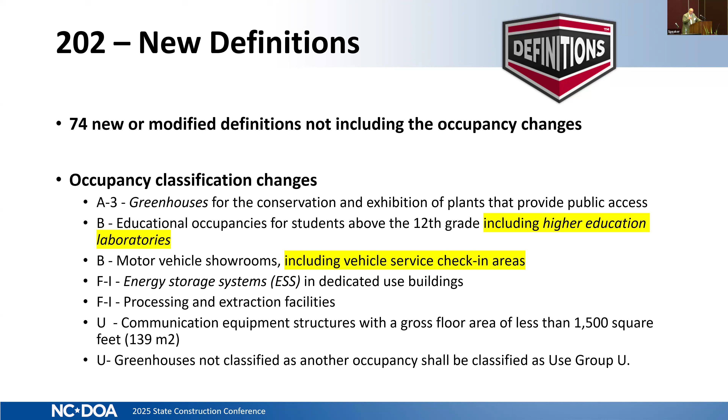There's a modification on the Group B motor vehicle showrooms that includes the check-in areas. If you have an area where a vehicle is going to be brought in to do triage and they're going to move the vehicle to do repair somewhere else, that area is still going to be classified as part of the Group B. Energy storage in a dedicated use building will be an F1 occupancy. Your process and extraction facilities will be F1. Then you have 2 Group U classifications for small incidental communication buildings and those greenhouses.

There's also 6 additional criteria added to 203 of the fire code, as well as 307 of the building code, that keeps a building from being classified as a Group H.

Aerosol storage is one of them if they meet the requirements of Chapter 51. Stationary fuel cell and capacitor energy storage if they meet the Chapter 12 requirements. The Group B higher education labs. And then the last two are your distilling and brewing and storage of beverages, your distilled spirits and wine storage.

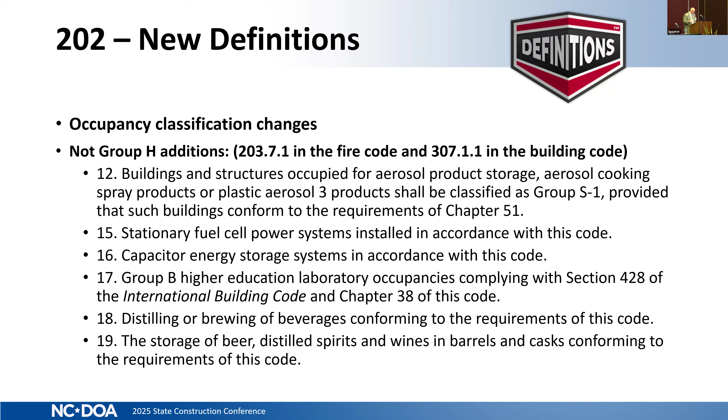So those will all remain how they're classified without being classified as Group H. We'll talk a little bit more about some of those as we get into the presentation.

Some of the key changes related to fire protection, and this is a big one, is that current code Appendix B and Appendix D are only enforceable if adopted through local ordinance. The new code deletes those two appendices and embeds those requirements into Section 503 for access and 507 for water supply.

The main reason for that was to provide consistent application across the state. With local adoption, you had some jurisdictions enforcing those requirements and others were not, and it was creating a consistency issue. So the committee's recommendation was to incorporate those requirements into Chapter 5.

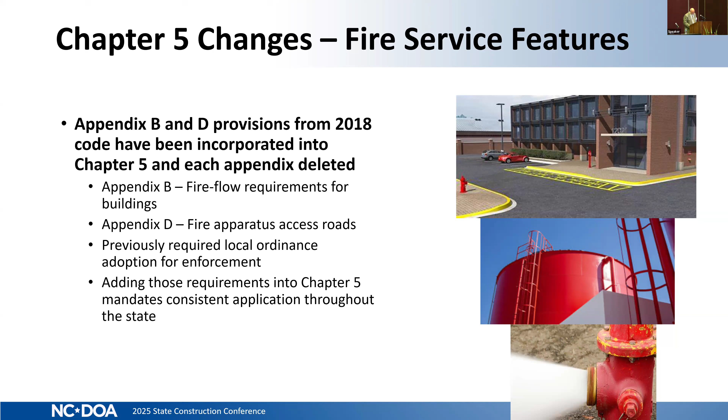So let's start by looking at some of the new access requirements that will be a result of that. The first one is we have two means of access now required for certain structures.

If I have a building that exceeds 3 stories or 30 feet in height, there'll be a requirement for 2 fire department access roads to access that building. If the building exceeds 62,000 square feet, there's also an exception that will allow that 62 to double to 124 if that building is protected by sprinklers. So a fully sprinklered building up to 124,000 square feet, you can still get by with 1 access route. If it's not sprinklered, anything over 62,000 is required to be accessed by 2 different routes.

The multifamily residential requirement - and I apologize for the inconsistency in the way it's worded - the first bullet says single access is allowed for up to 200 units if they're sprinklered with a 13 or 13R system, which commercial apartments newly built in North Carolina will be. But really the requirement is multifamily with more than 100 dwelling units, so you'd have to exceed 200 dwelling units before that access requirement is there for 2.

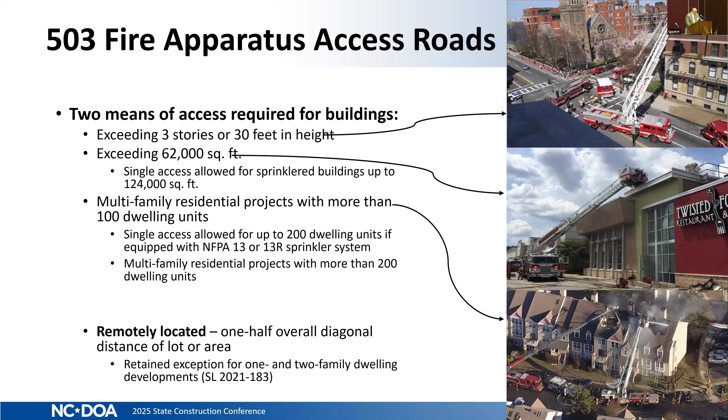There's also going to be new requirements for aerial apparatus access roads where the vertical distance between grade plane and the highest roof surface is over 30 feet. So if there's a requirement for aerial apparatus access, then that road width is going to increase from 20 feet wide to 26 feet wide. That aerial apparatus has to be at least 15 feet away from the face of one side of the building and no more than 30 feet.

And there cannot be any overhead obstructions. So any utility, power lines, none of that can be within the designated area that's identified as the aerial apparatus access.

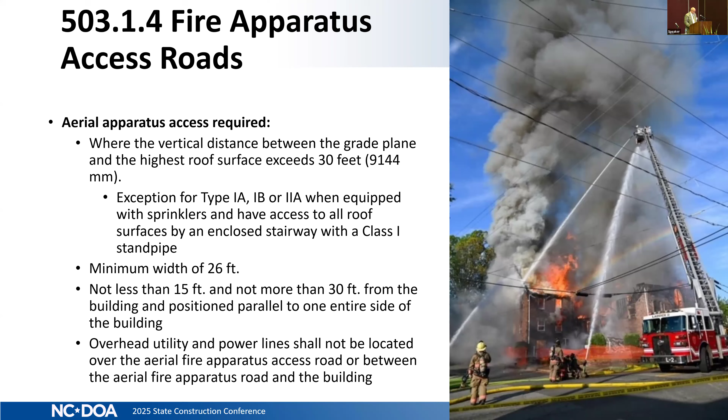So those are the requirements for access. Now related to needed fire flow.

When new buildings are constructed, we have to have a needed fire flow for the fire department to be able to extinguish a fire in that building based on construction type, size of the building, and a lot of different parameters. The local jurisdiction generally is going to determine which methodology they're going to use to establish the needed fire flow.

So there's the Appendix B method that's in our current code, there's an ISO method, there's NFPA 1142. There's a lot of different fire flow calculation methods employed across the state of North Carolina. The way this new code is going to be written, we've pulled the tables into Section 507 from Appendix B. However, we left those options in there for local jurisdictions to utilize ISO or any of these other methods. So we're not just simply saying you have to meet the Appendix B fire flow criteria. We know that's not practical in the majority of the state of North Carolina.

Fire flow requirements in a jurisdiction with 24-inch water mains and hydrants every 300 feet is much different than in rural North Carolina where your water supply systems don't exist. So there has to be a level of flexibility built into the code, but at the same time we need some level of fire flow and available water supply for the fire department to be able to function.

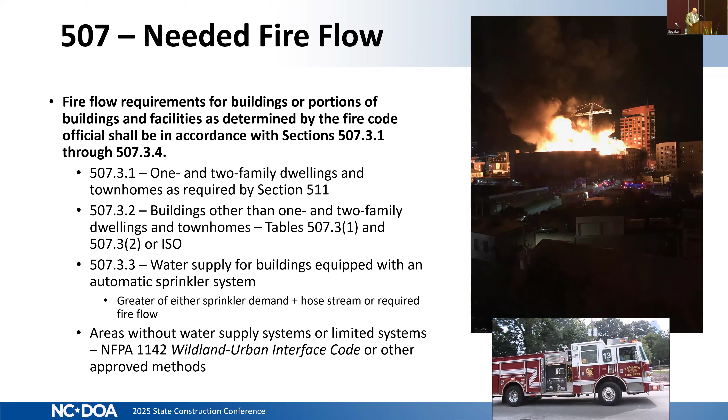So the way the code's going to be written, you'll have a table. If a jurisdiction decides they're going to use the Appendix B criteria, this table will direct you to another table for calculating the fire flow. If there's no automatic sprinkler system, that's the top row, middle row is an NFPA 13 system, bottom row is an NFPA 13R system. Both 13 and 13R give you a 25% reduction in not only the needed fire flow calculation, but the duration as well.

So if I look at this table, based on the size of the building and construction type, if I have a requirement for 2,000 gallons a minute for 2 hours, and I put an NFPA 13 system in that building, now my fire flow calculation is reduced to 25% of that number, which becomes 500 gallons a minute, not 2,000. But remember those two footnotes.

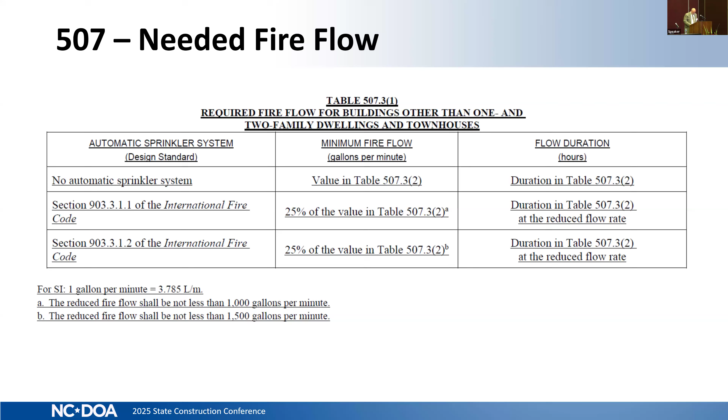Footnote A is going to tell you if it's an NFPA 13 system, regardless of the 25%, you still have to provide 1,000 gallons a minute. If it's a 13R, you still have to provide 1,500 GPM. That's assuming they're using the table for that calculation.

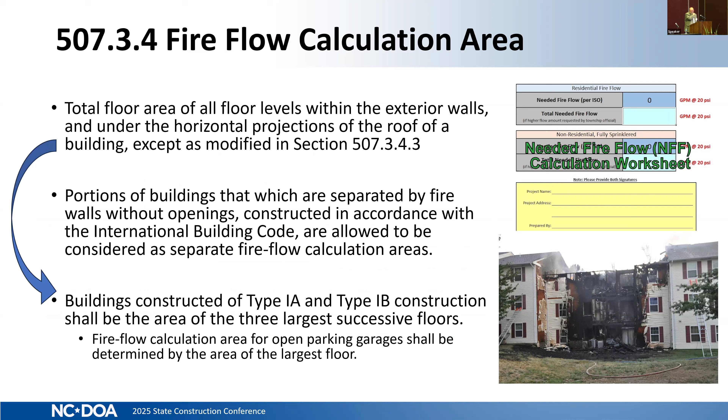The code is also going to identify how to calculate the fire flow calculation area. Generally what we're talking about is what's within the footprint of the building or any additions or overhangs that could potentially be used for storage.

Section 508, there's an amendment. The current code requires fire command centers be installed or provided in high-rise buildings. The new code is going to expand that requirement to F1 and S1 occupancies over 500,000 square feet, and there's a number of those under construction in North Carolina right now. So again, the new code will require those fire command centers in those large open plan warehouses and factory industrial occupancies.

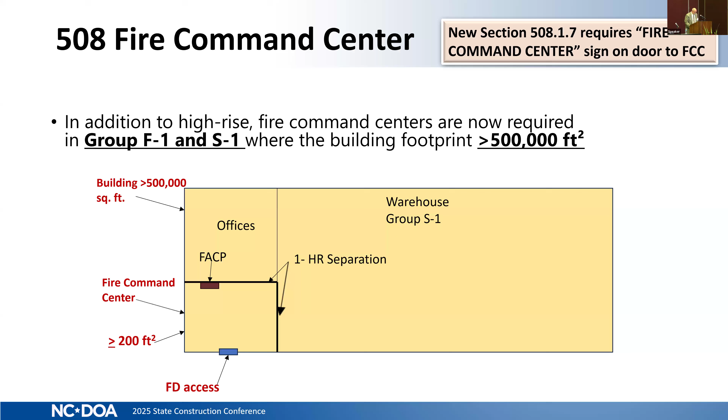Emergency responder communication coverage. I included this in the presentation, not because it was a code change we recommended, but it was legislative action from Session Law 2024-49 that's going to require us to modify the 2024 code. Right now, based on that exception 4, if your building is less than 7,500 square feet, there's not a requirement to do an evaluation to determine if you have adequate radio communication for emergency responders. This session law is going to change that requirement to 12,000 square feet before that requirement is in place, as long as there's no below grade area.

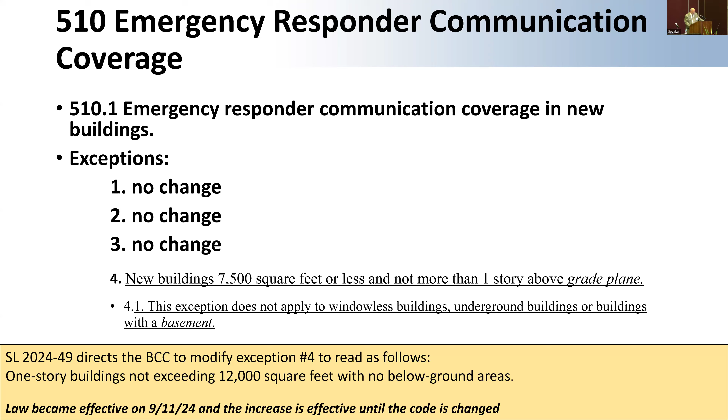Fuel oil storage. Bob and those folks that were up here prior to me talked about the replacement of that generator. The new code is going to provide some options for installing tanks for fuel oil storage. The big change is, well, there's a couple of changes. One is we're specifically saying UL 80, 142, or 2085 are the listed tanks that are able to be used for a fire pump or diesel generator or whatever.

The other significant change is the code is now going to allow the 660 gallons that's the limit now in a 142 tank to double to 1,320 gallons if the building is sprinkled. So if they put in a UL 142 tank in a sprinkler building, that 660 goes to 1,320.

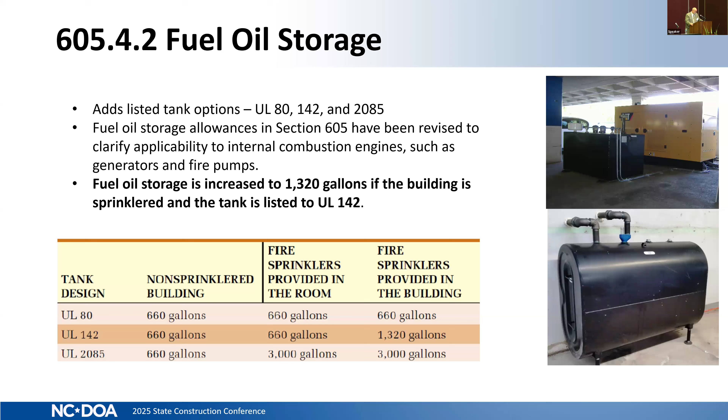There's two parallel requirements that come along with that, though. Number one is that tank has to be in a 1 hour rated room now. So you're going to have a 1 hour fire barrier that wraps that room, unless the tank is UL 2085 listed. A UL 2085 tank is 2 hour thermally protected, it has ballistic protection, it has vehicle impact protection. Doesn't make any sense to require added cost to build a 1 hour room when the tank is already protected to 2 hours.

The second requirement is for spill control to be provided if the storage is over 60 gallons or an aggregate over 1,000, unless it's integral to the tank. So if you have listed secondary containment tanks, the spill control would not be required.

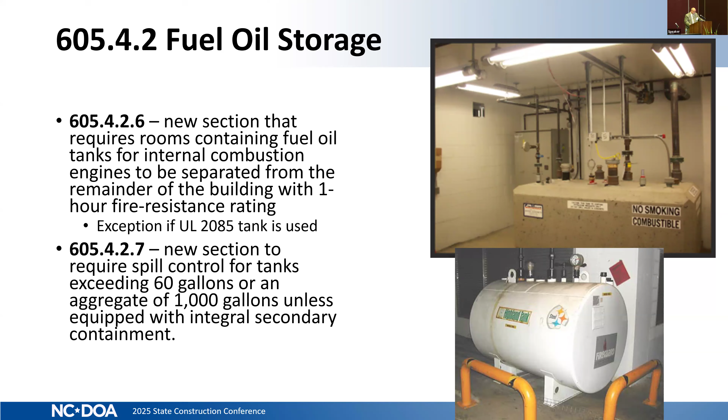All right, we'll spend the majority of the presentation looking at changes to Chapter 9 related to fire protection. I felt like that was probably what I could fit into the time frame. So I want to at least make you aware of some of these big ticket items that have made its way into the code. The first change is in 901 related to acceptance testing or commissioning of new systems.

NFPA 4 is going to be a new standard that is going to be tied to integrated testing for high-rise buildings, and also if you have buildings equipped with fire alarm that also has smoke control systems, you'll have a test plan identified based on NFPA 4. So prior to CO and at 10-year intervals, you'll have to do this testing. If there's an equipment failure, you're only going to test whatever fails. You don't have to go back through the entire integrated testing.

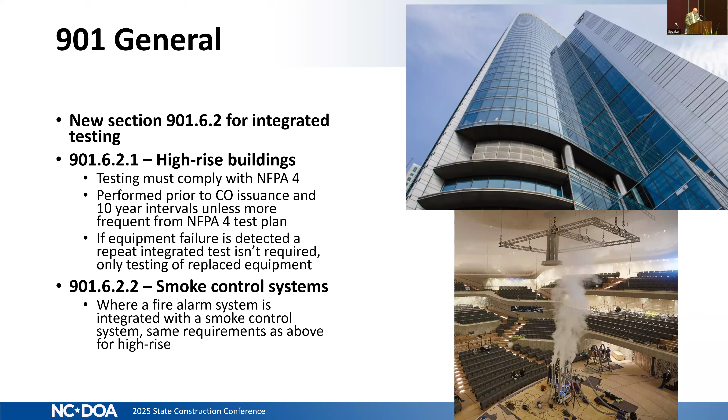All right, let's look at some of the new triggers for new sprinkler installations. Some of these are huge when it comes to the new code.

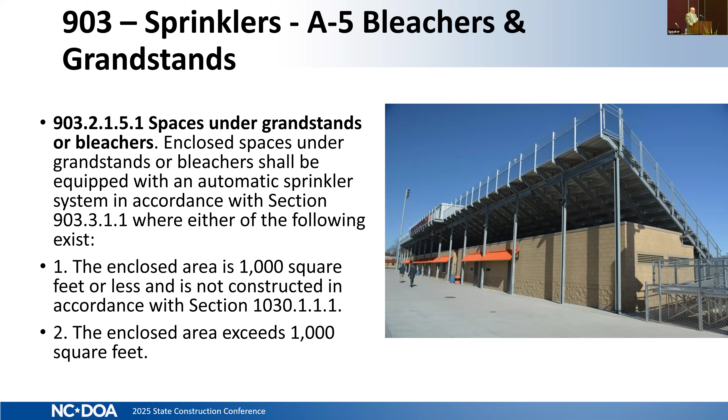First item, spaces under grandstands and bleachers. If either one of the following conditions exist: if the enclosed area is 1,000 square feet or less and not constructed in accordance with 1030.1.1.1, or the enclosed area exceeds 1,000 square feet. 1030.1.1.1 comes from not only the fire code, but chapter 10 of the building code as well, which requires those spaces to be protected with 1 hour fire resistance.

But the exceptions say ticket booths less than 100 square feet, toilet rooms and other accessory use areas 1,000 square feet or less if equipped with sprinklers. So the intent behind this change in 903.2.1.5.1 was to parallel this requirement in 1030.

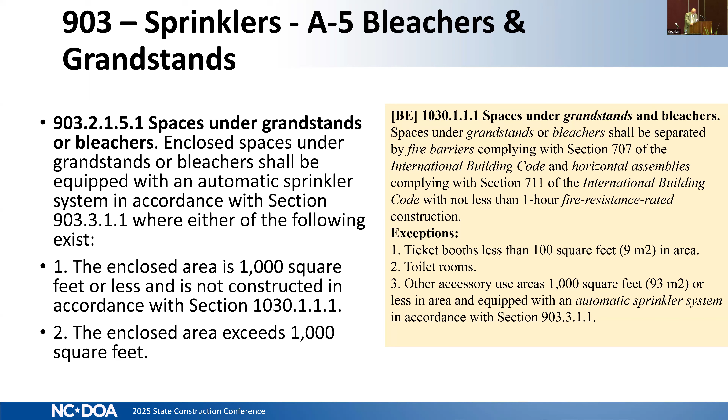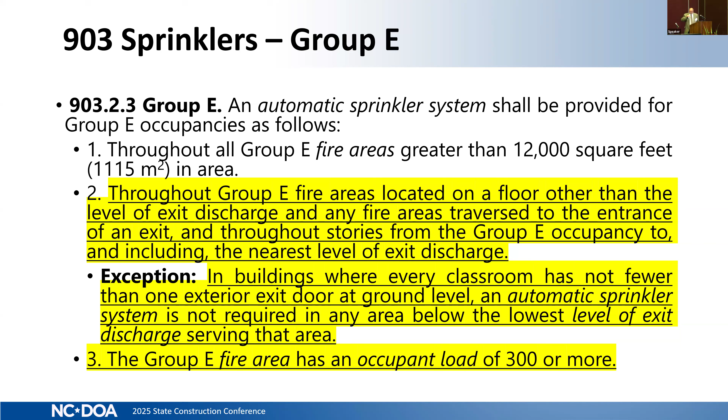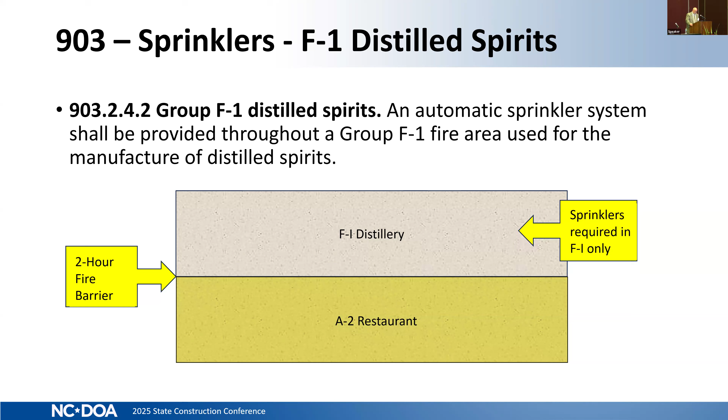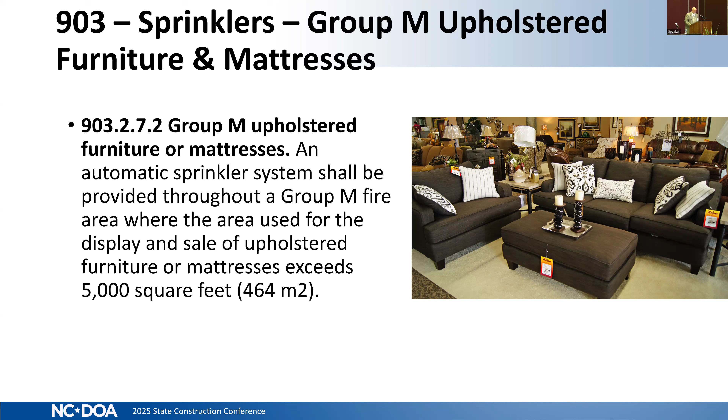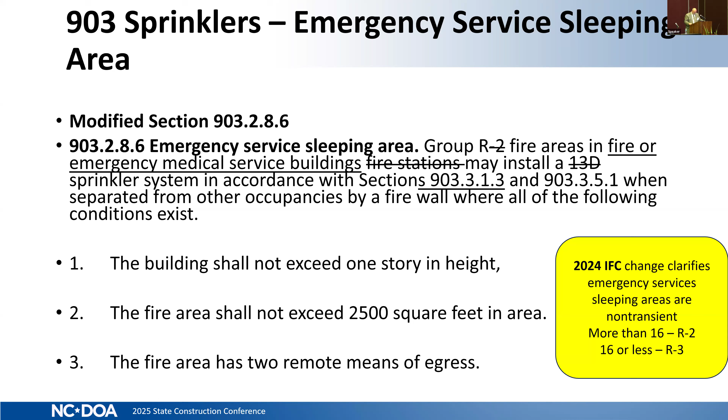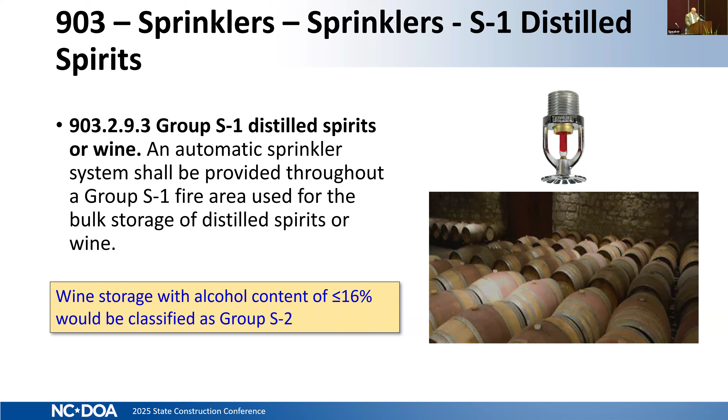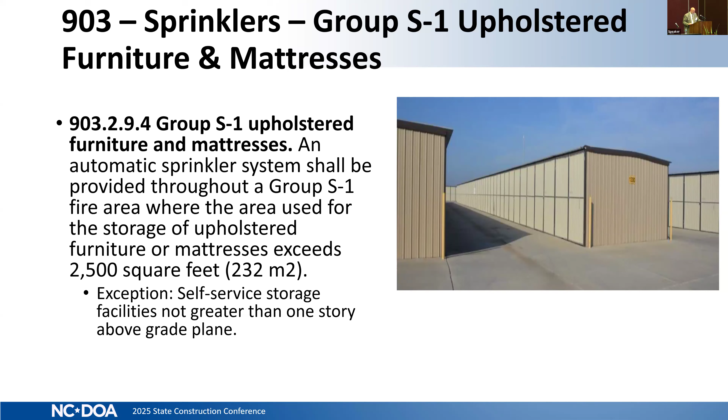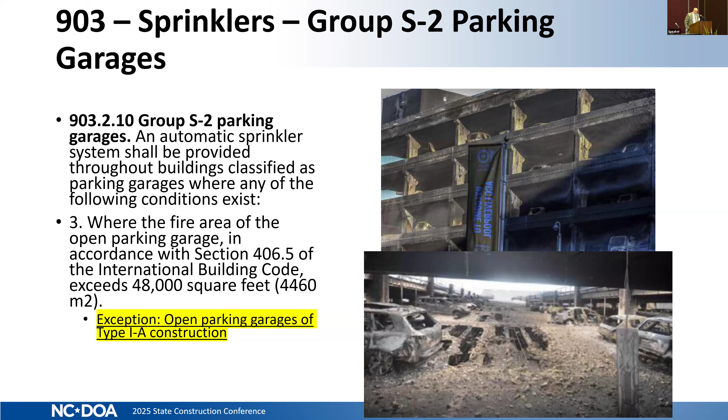There's also going to be a requirement if it's a mechanical access parking garage. Again, no trigger on size. If it's mechanical access, there's going to be a requirement for sprinklers.

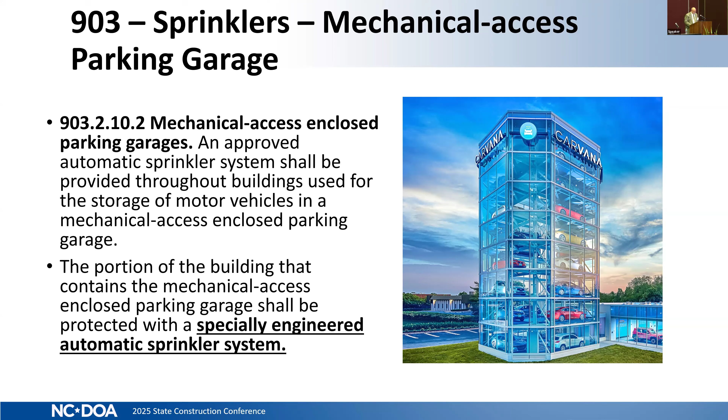All right, let's look at some of the changes specific to the various standards, 13 and 13R primarily. So this change, if you look in the current code, in Group R occupancies other than R4, you're not required to sprinkler bathrooms that are less than 5 square meters, or

55 square feet. The new code is going to include R4 in that option. So if you have assisted living facilities, congregate care facilities, alcohol treatment, some of these that may be protected with an NFPA 13 system, if the bathrooms are less than 55 square feet, you can omit sprinkler protection in those bathrooms.

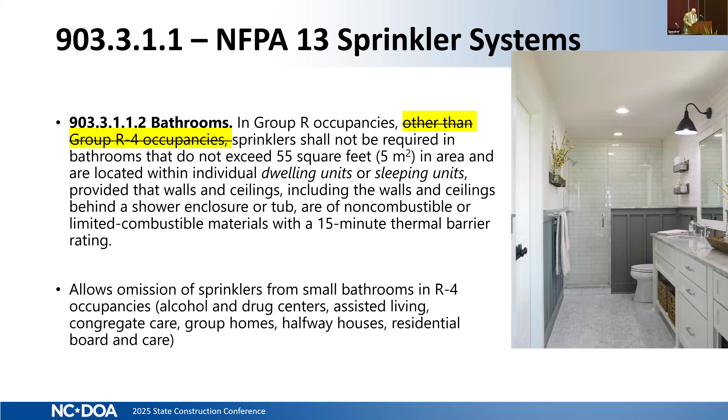All right, here's another big one. Under the current code, you can build 4-story on top of a pedestal or podium and protect it with a 13R sprinkler system, if the building doesn't exceed 60 feet in height. That goes away in the new code.

The allowance for a 13R system, 4 stories, is measured from grade plane. So if you're going to build a 2-story podium and put residential on top of it, the 2-story podium counts as your first 2 stories.

So you can go 2 stories above that podium, as long as you don't exceed 4 stories, and protect it with a 13R. You put 3 stories on top of that podium, now you're going to put a 13 system in that building.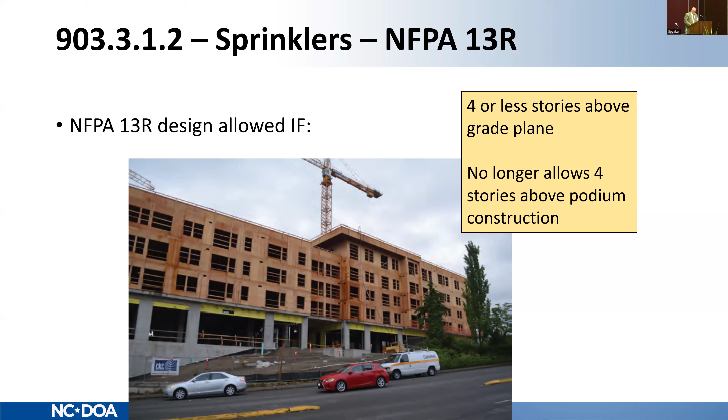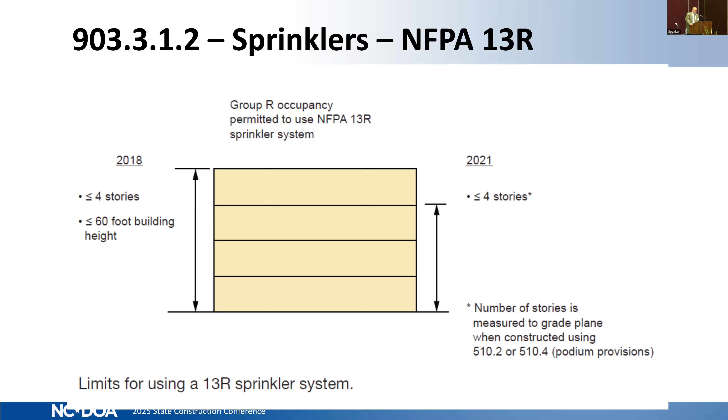Significant change based on where we're at in the code now. There's a lot of buildings out there that have been built with 13R systems on top of pedestal or podium buildings and have created some high-challenge fires for the fire department because a lot of those areas are not protected. That change is significant in the new code.

Another change in the new code related to 13R systems is where the code gives you the option for type 3, 4, or 5 construction. So you can build these, say an apartment building with type 3, 4, or 5. The new code is going to say you can build that balcony or deck with 5B construction, but it has to be protected. So the highlighted change there is what's new.

It's intended to parallel the requirement in Chapter 7 of the Building Code.

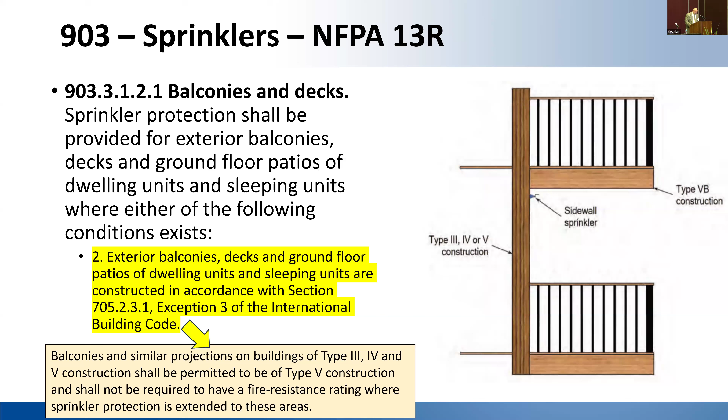Some more 13R changes. So number 4, if I have open-ended corridors in a 13R building, I have to sprinkler that corridor based on 1027.6. The new code is also going to require sprinklers if I meet any one of these other 4 options.

Combustible finish, walls, floors, whatever - that corridor is going to get sprinkled. Change in direction more than 45 degrees. Less than 50% open to the outside air. Or if you have egress balconies that are not open in accordance with 1021.

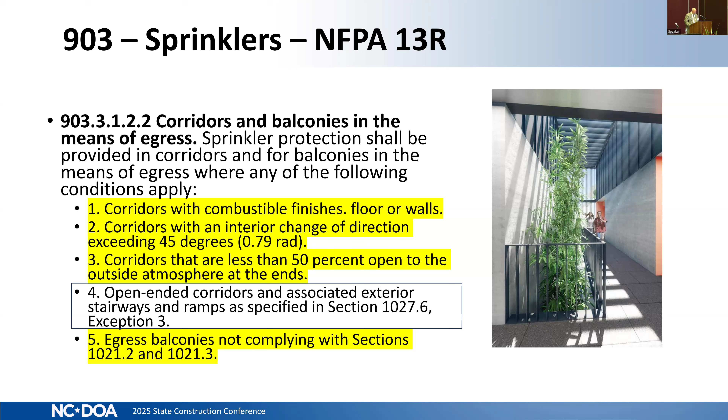We also have some changes related to 13R as it involves attic sprinkler protection. So attic sprinkler protection is going to be required if any of these conditions are met. Number 1, if we're going to use the attic for storage, the standard doesn't require sprinklers, but the code now will require that attic to be sprinklered. Where fuel-fired equipment is installed in the attic, you don't have to have sprinklers throughout, but you'll have to install one above the equipment for cooling.

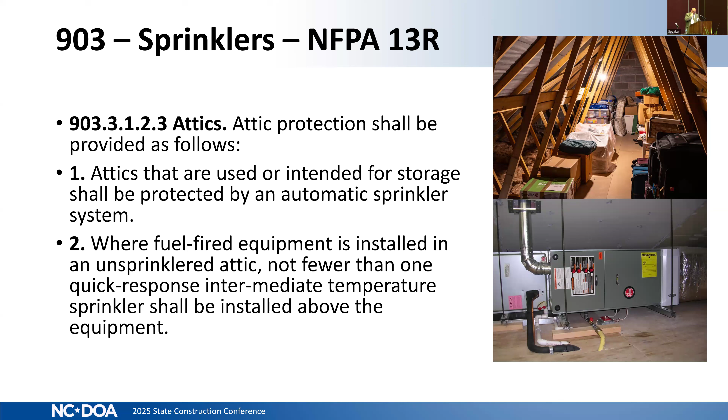Back to those type 3, 4, and 5 construction that reference back to 510 and the pedestal buildings in the building code. Attics that are not required by item 1, in other words, we're not using them for storage, have to be sprinklered if the roof assembly is more than 55 feet above the lowest level of fire department access.

But the code's going to give you an option. So either you sprinkler it, you construct it using non-combustible material, you use FRT complying with Chapter 23 of the building code, or you fill the attic with non-combustible insulation.

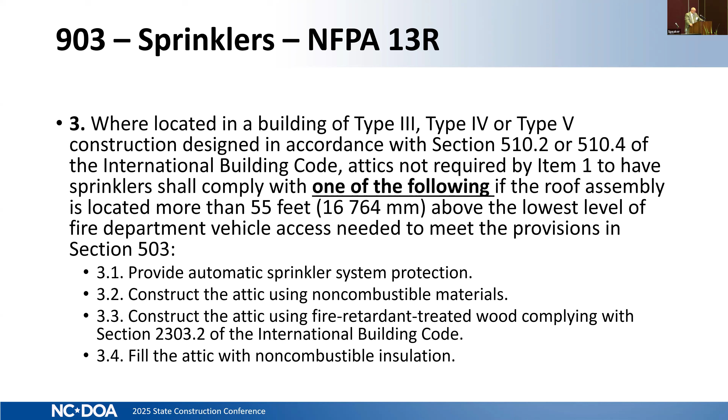And when you're measuring that 55 feet, it's going to be to the highest, or excuse me, whatever yields the greatest distance of those 3: the eave of the highest pitch roof, the intersection of the highest roof to the exterior wall, or the top of the highest parapet. Whichever one of those 3 yields the highest distance will determine when sprinklers are required.

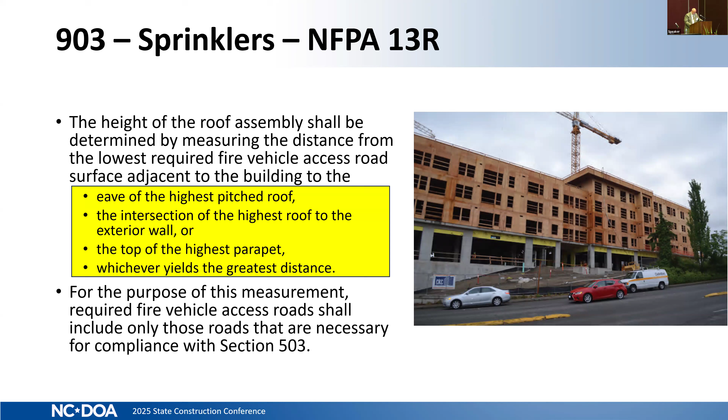You also have a similar requirement in R4 condition 2 occupancies. Again, if the attic's not going to be used for storage, we have 5 protection options now. 4 of them are identical to what we just talked about. The only one that's different is the heat detection.

The only reason we're requiring this is because of the condition 2. The occupants in that R4 occupancy are going to require some level of custodial care, which is going to delay their ability to get out of that building. That's the reason for the added protection.

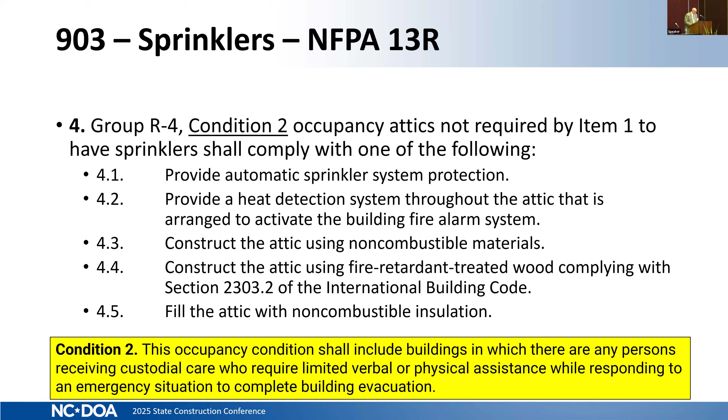The change here was to clarify when sprinklers are going to be required for obstructions. We've always had the requirement that if you have an obstruction that exceeds 4 feet in width, then you have to sprinkler underneath it—garage doors, HVAC duct, whatever. This change simply says, in addition to that, you also have to evaluate the applicable standard that the building is protected under. So the example I gave you is from Chapter 8 out of NFPA 13.

Open grate flooring now, even if it's open, if it's more than 4 feet in width, Chapter 8 of NFPA 13 requires sprinklers underneath that. So that was the reason why this change was necessary in 903.3.3.

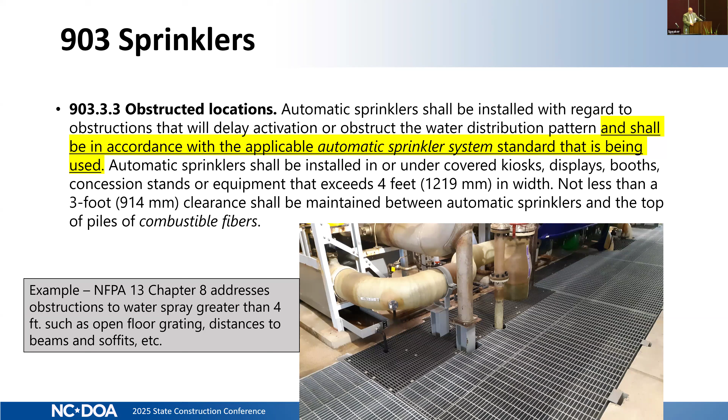904.12 is a new section specifically for aerosol fire extinguishing systems that you may start seeing in some locations. If you do, then the requirements in NFPA 2010 are going to be applicable.

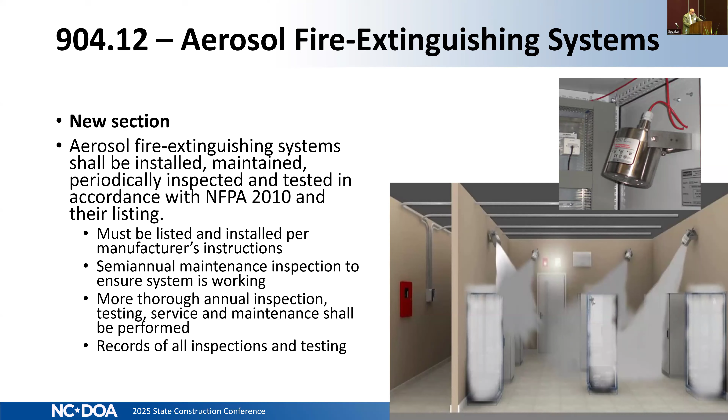Two changes to the commercial cooking requirements. For the first time ever, the fire code is going to reference NFPA 96. It's always been referenced in the mechanical code, but now the fire code will reference that for more than one reason, and we'll talk about a couple of those in a little bit. The other change is to pull in a reference to NFPA 750 for the automatic water mist systems that are used a lot in food prep, commercial food prep operations.

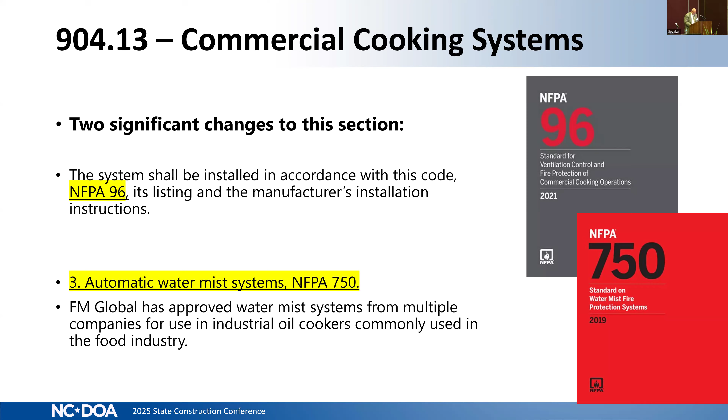We modified section 904.13.1. Current code says if I have a manual release for that automatic suppression system, it has to be at least 10 feet and no more than 20 feet. The problem was that 10 feet was problematic. So we changed this to retain the 20 as the max, but we eliminated the 10.

The other reason for that is we have UL listed equipment that has the pull station on the equipment. So you couldn't meet the 10-foot setback requirement, and we had issues from vendors saying 10 feet was problematic in some of these smaller kitchen applications. So we made that modification.

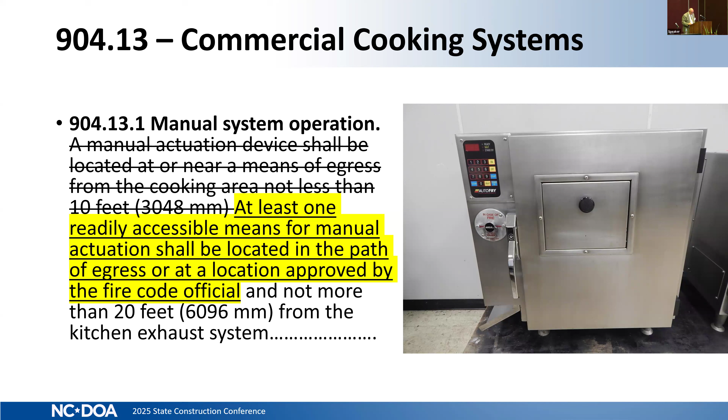904.14 is going to parallel 3 sections in the building code, Chapter 4, for your I-1, I-2, and R2 college dormitories. So what those sections are going to require in the new code is that cooktops and ranges have to be protected in those 3 applications.

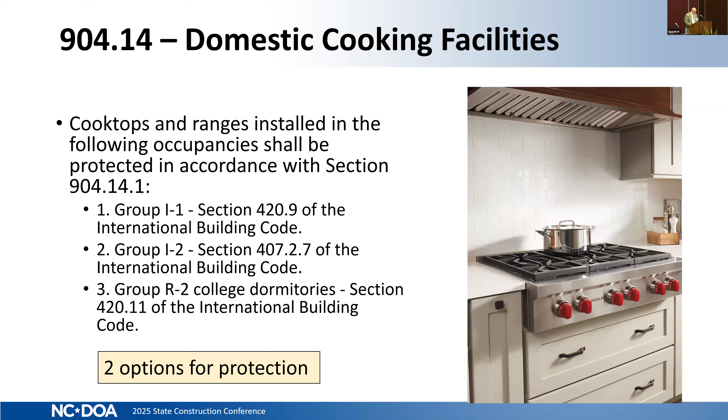904.14 of the fire code is going to provide you those 2 protection options. One is you can put a UL 300A suppression system within the range hood, or you can use UL 858 listed burners that are manufactured for the express purpose of shutting down automatically when you get to a certain temperature. So that'll be a design option, either or. The code gives them that authority.

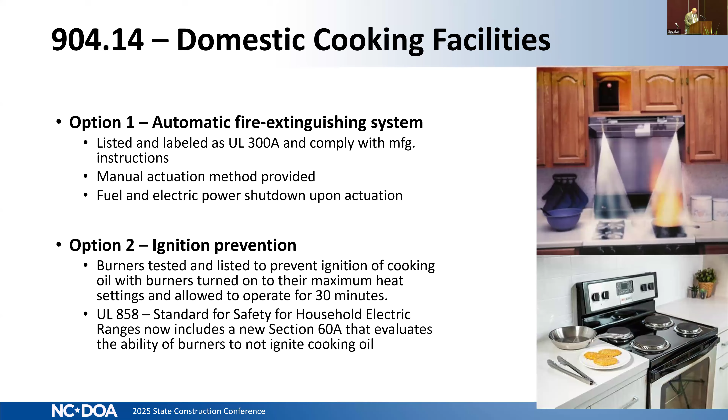Standpipes. The significant change here is the code's going away from requiring the standpipe hose outlet at the intermediate floor level. The new code is going to require it at the main floor landing.

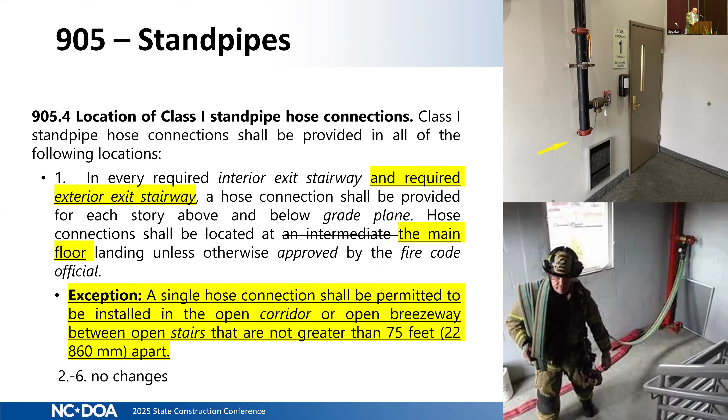There's changes to 906 related to fire extinguishers. Not going to go through this in a whole lot of detail, but number 2 basically is going to allow schools to eliminate fire extinguishers in those common use areas if they put one in every classroom.

So if you think they're going to go from 8 or 10 in a school building to 40 or 50, one in every class, raise your hand if you think that's going to happen. It's not going to happen.

The other option is for Group S occupancies where the occupant is primarily someone on a lift truck. We're going to eliminate the requirement to have fire extinguishers scattered throughout the building as long as they're provided on the lift truck for that employee, assuming there's not other occupants in the building.

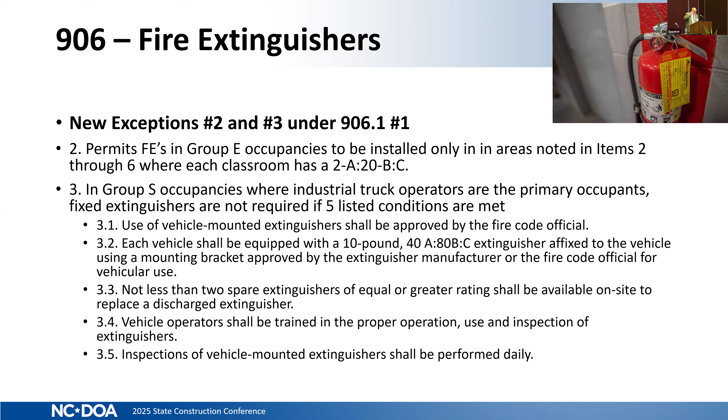We also made some changes to address the domestic cooking that we just talked about. There still will be requirements for portable fire extinguishers, whether they choose the suppression or the ignition prevention burners. There'll also be an exception for fire extinguishers in normally unmanned Group U buildings, as long as the service equipment truck that goes there has a fire extinguisher on it.

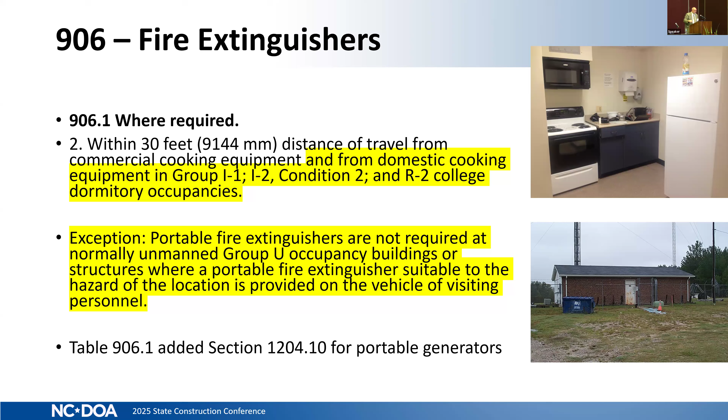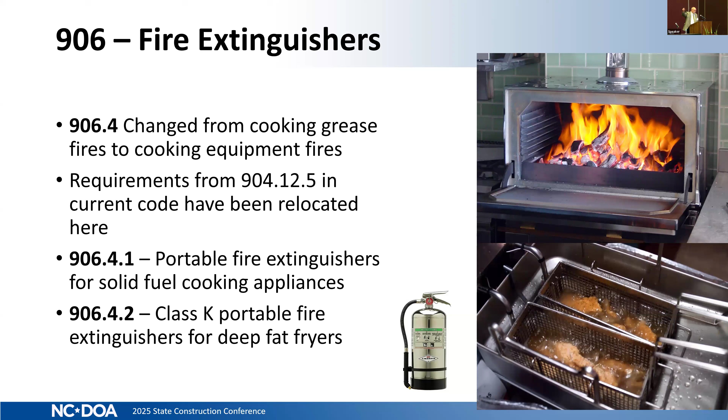This change is really just relocating your fire extinguisher requirements from 904 for solid fuel and deep fryers to 906. All it is a shift in location. The technical change is not there.

The 2021 International Code eliminated manual and automatic fire alarm detection for R4 occupancies. But because North Carolina DHHS has a requirement that adult and child care in R4 are to be equipped with a fire alarm system, we had to relocate this section from 907.2.10 to 907.2.24. The only other thing we done was change and remove the residential listing.

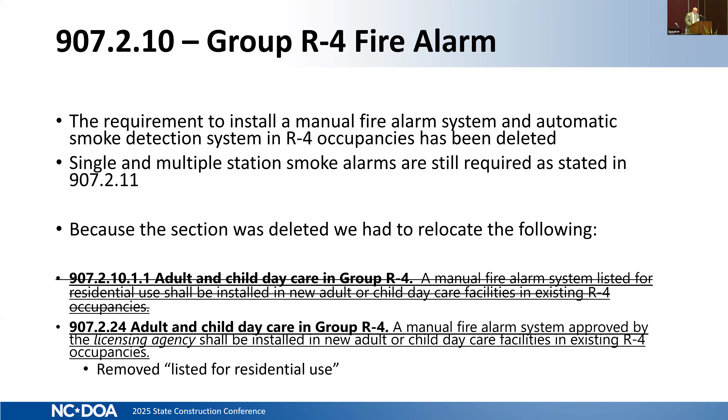There's a requirement in the new code for your Group S self-storage, 3 or more stories. There will be a requirement to have fire alarm installed in those.

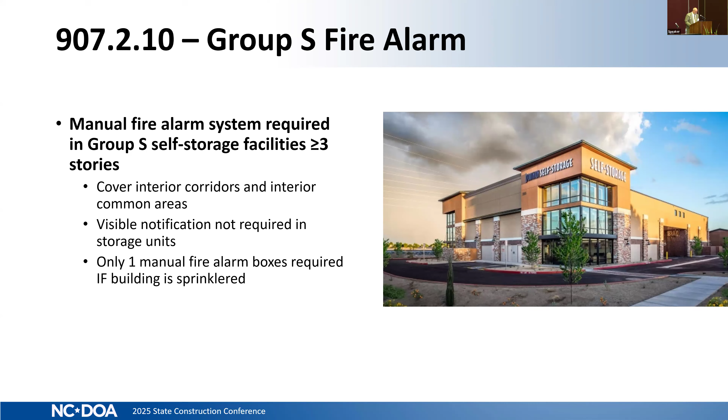The code's finally catching up to the standard as it relates to the 520 low frequency signaling in your R1 and 2 occupancies. So the code's going to give you the option to use as part of an integral notification in the detector or the use of a sounder base, either one.

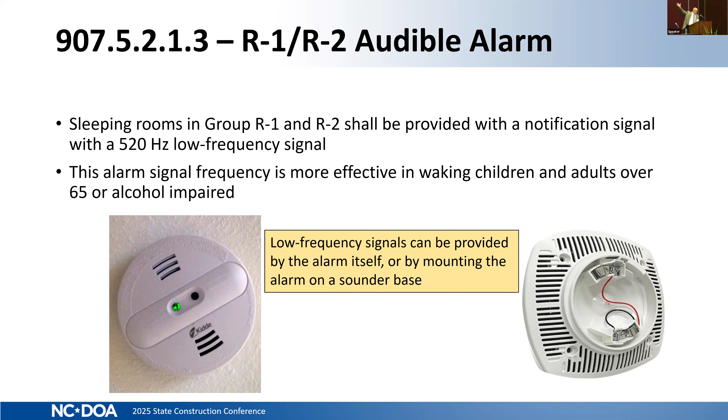There's a new section 90710 to require smoke alarms to be tested and maintained and replaced when they fail to respond to these tests or when they exceed 10 years from the date of manufacture. So any facility that has smoke alarms now will be required to perform these tests and document those.

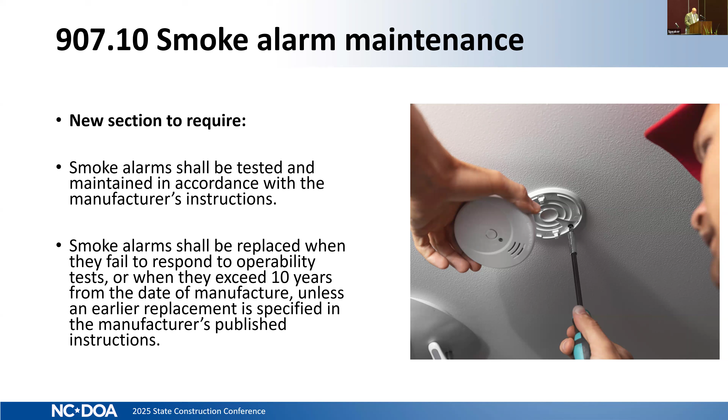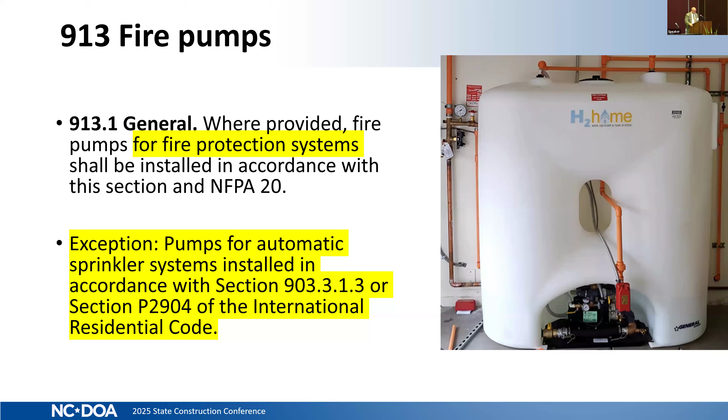Fire pumps in 913, the change here is simply saying if you have a sprinkler system installed as a 13D or a P2904 from the residential code, that pump does not have to meet NFPA 20 as long as it's listed for that residential use. Okay?

They also modified 913 regarding the thermal protection required for your fire pump electrical circuits. We already have the 2196 listed cable. These changes add 3 more options.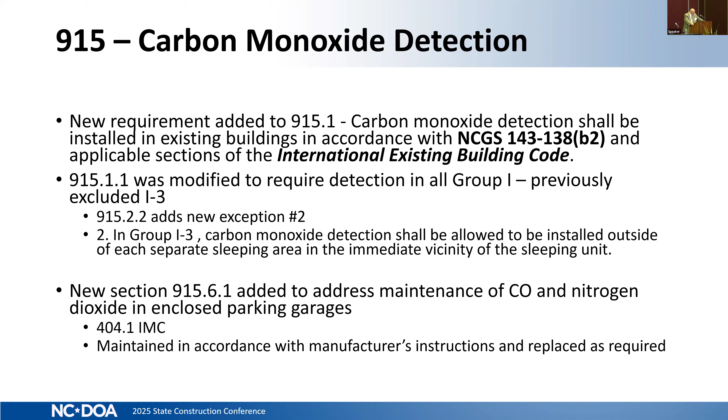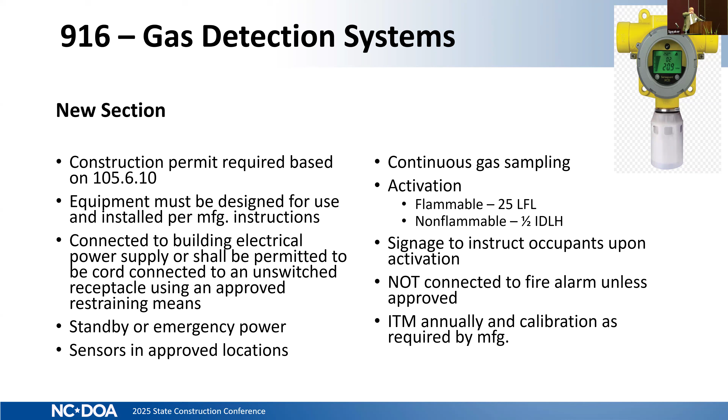There's a new section 916 for gas detection systems. And this section is simply going to contain the requirements, but it's really going to be pointed to from other parts of the code. So as an example, plant extraction facilities - there'll be a section in Chapter 39 that will require gas detection in accordance with 916.

Mass notification alert systems for college and university campuses. If the cumulative occupant loads over 1,000 people, the new code is going to require a registered design professional to do an analysis based on NFPA 72 to determine the need. If that analysis determines there's a need, then a system will be required. Most of these probably already have something in place.

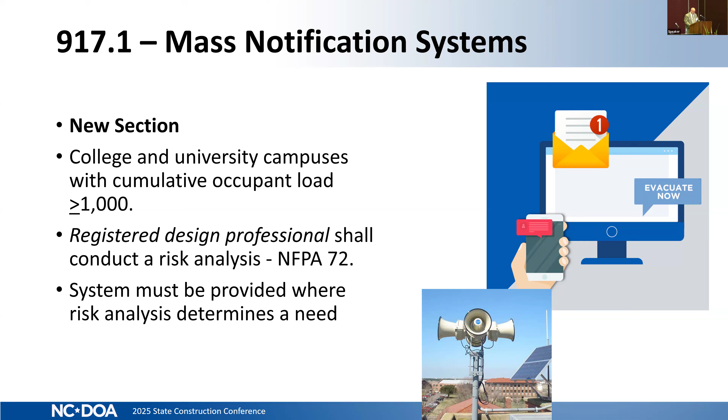New Chapter 12, not going to expand too much on this. We did move some requirements for emergency and standby power that's in 604 now to the new 1203, and all the solar photovoltaic requirements that's in 605 have moved to 1205, but this is a brand new chapter that deals with all the new energy storage system configurations that we're seeing coming into the state.

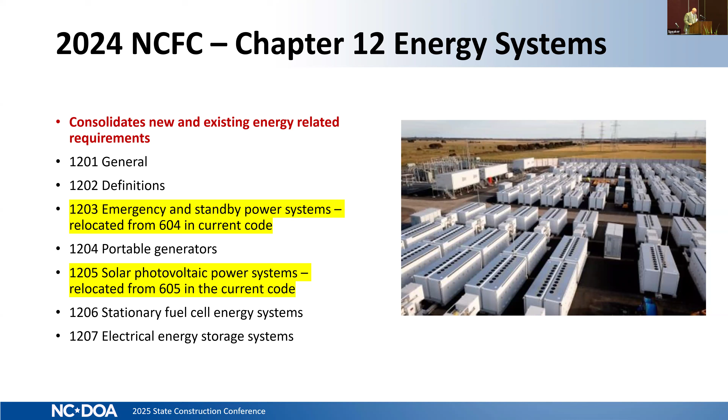Chapter 33, buildings under construction, went through several major modifications. And I'm going to skim through these pretty quickly for the sake of time. But a couple of the key components: if you're building a new building, a site safety plan must be developed and will be required to be submitted to the fire code official prior to the start of construction.

The model code language, the requirement was that that be submitted prior to the permit being issued. North Carolina modified that language, unfortunately.

Because what's going to happen now, they're going to walk out the door and get a permit, start construction on the project. How many of them you think are going to say, oh, by the way, we forgot to submit that plan, let's go take care of that? Which is going to end up being local fire code officials going to come out, if they're going vertical on that building and have started construction without that plan, a stop work order is going to be issued. That's the environment that this has created.

The other change is there's going to be a requirement for a site safety director, and more importantly, there's going to be a requirement for daily fire safety inspections for the duration of that project until the CO is issued.

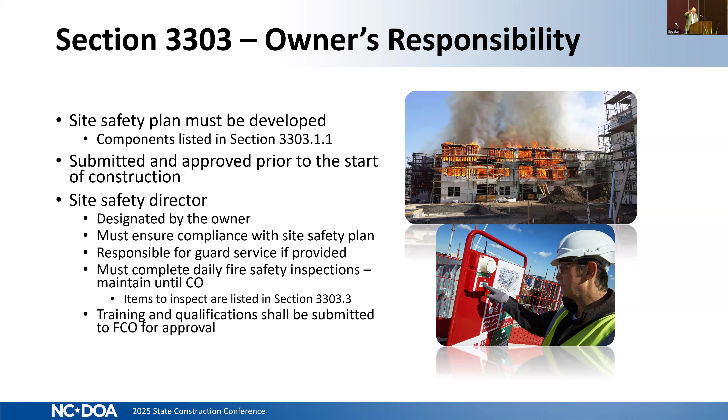So I'm sure some of you are familiar with the new mass timber requirements that are coming in North Carolina. As part of our new code, we're going to have 3 new construction types: 4A, 4B, and 4C.

We've had to modify the requirements for these buildings under construction because they're at a vulnerable state until the build out occurs. When the building is finished, we've got safety systems in place, we've got fire protection in place, we can protect the buildings. Until we get to that point, though, these buildings are somewhat dangerous.

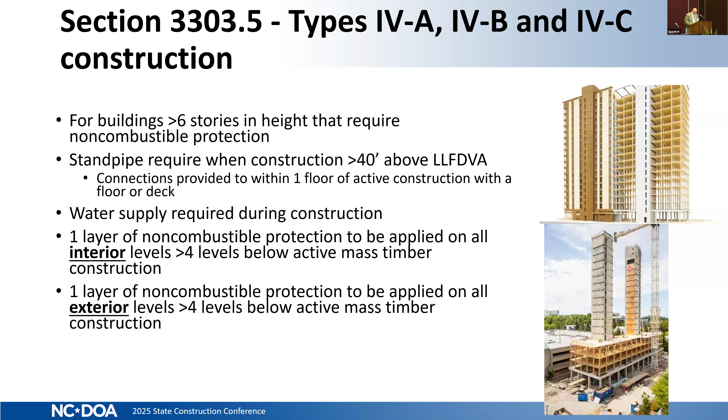As you can see, based on what we're going to see come into the new code, just as an example, if I build a mass timber 4A construction, I can build a 20-story Group B occupancy with mass timber. I can build 18-story R2 apartment buildings with mass timber.

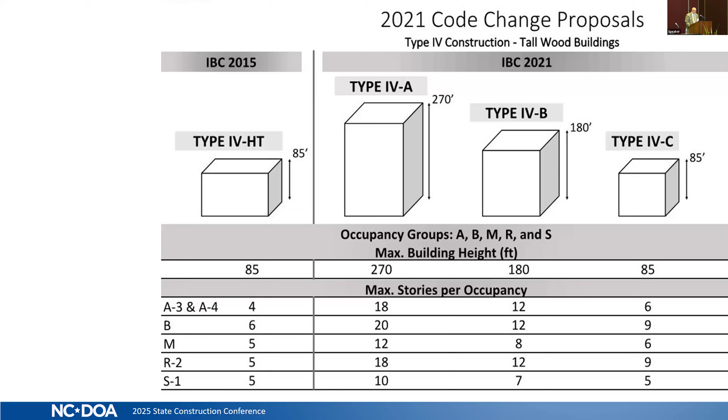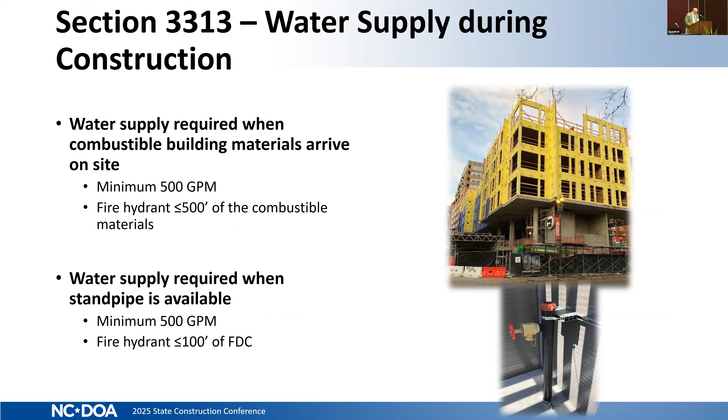We modified the fire watch requirements for demolition and new construction. We modified the water supply requirements. We talked earlier about your needed fire flow, and once you calculate that needed fire flow, this section is going to identify what that minimum requirement is going to be during the course of that construction. Based on the exposure separation distance, essentially how far are you from the property line, will determine what percentage of that needed fire flow you're going to have to provide.

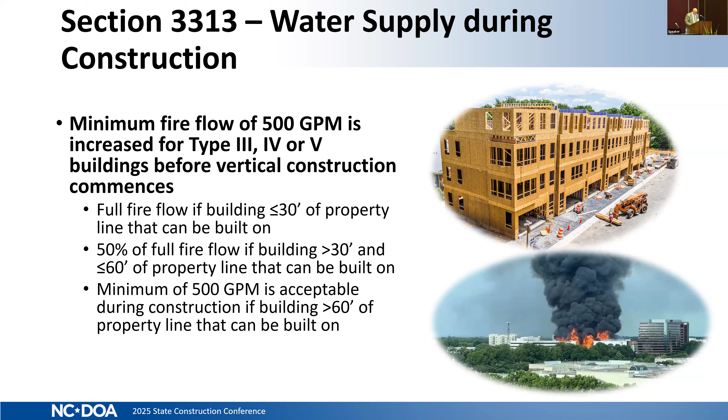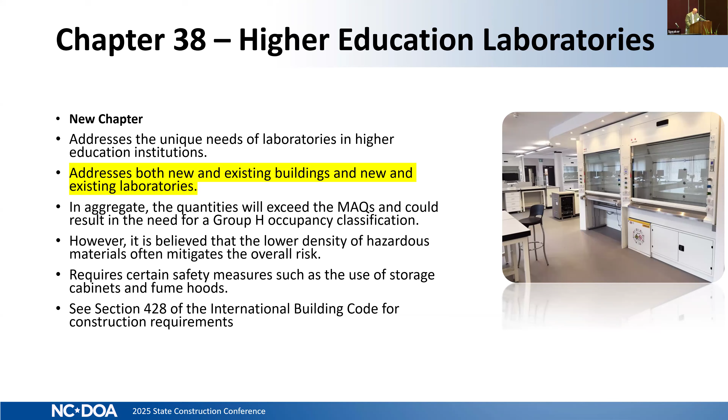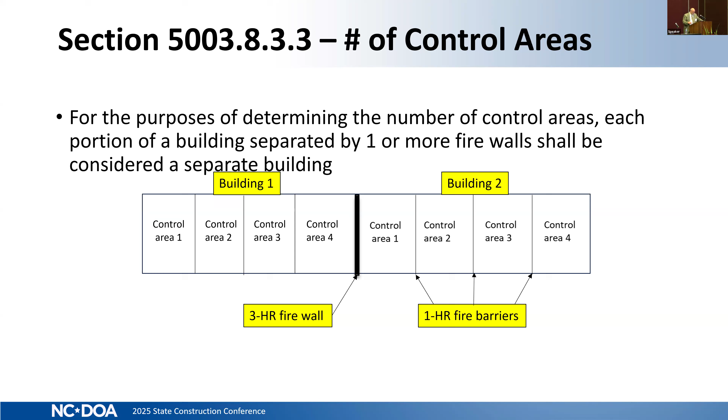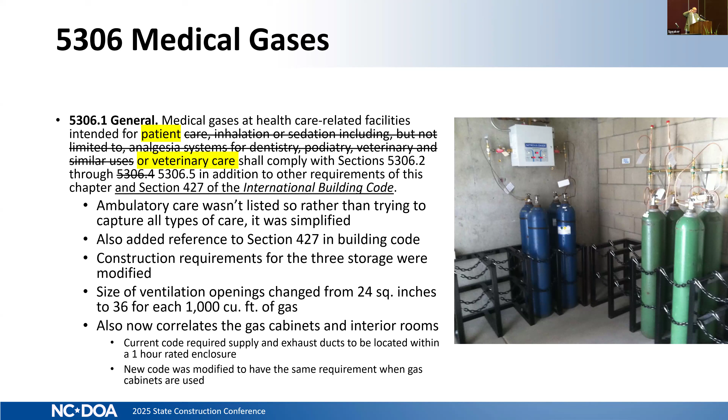The last change, there's 3 options in this section: you can use a 1-hour exterior room, 1-hour interior room, or gas cabinets. If you use the 1-hour interior or exterior room, your supply and exhaust has to be in a 1-hour shaft to the outside of the building. This change says if you're going to use a cabinet to satisfy the intent behind this section, that same requirement applies for the cabinet. So your supply and exhaust duct to the exterior will be in a 1-hour shaft from the cabinet, just like it will be for the rooms.